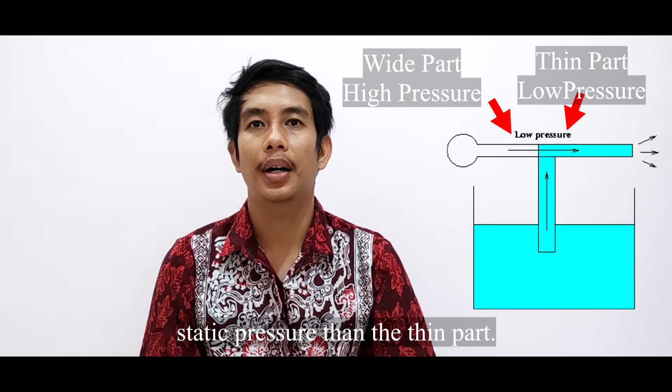Hi, now I'm going to explain the Bernoulli principle. Bernoulli's principle is an idea of fluid dynamics. It says that as the speed of the fluid increases, pressure decreases. This photo shows that the air in the wide part of the tube has a higher static pressure than in the thin part. For a steady flow, the amount of fluid entering the pipe must equal the amount leaving the pipe. So the fluid speed in the thin part must increase.

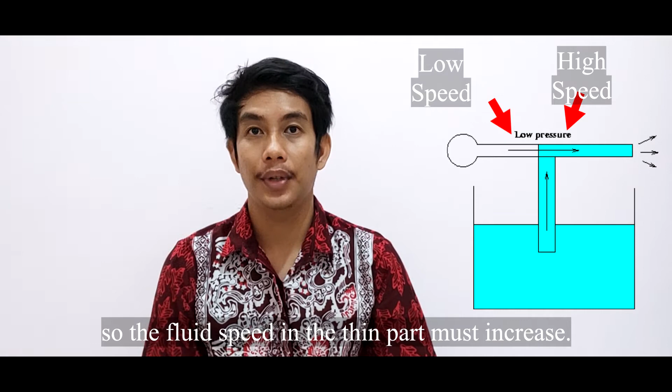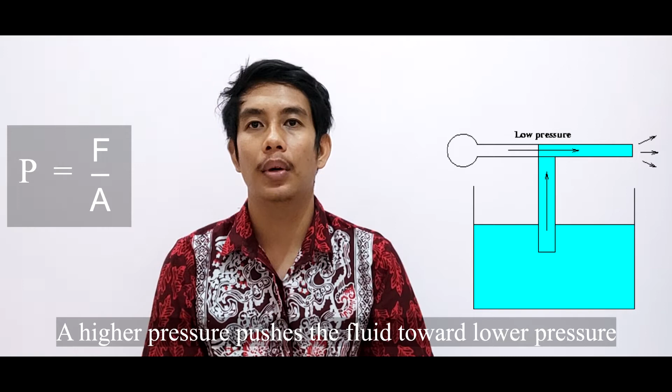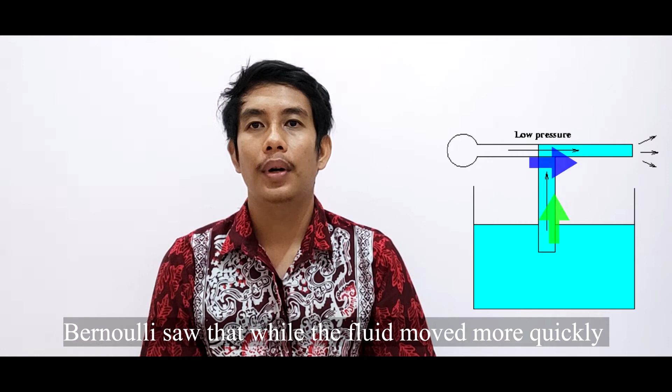When force acts over an area, it is called pressure. A higher pressure pushes the fluid toward lower pressure. So any change in the fluid's speed must be matched by a change in force. Bernoulli saw that while the fluid moved more quickly in a smaller part of the tube, the pressure becomes less. Therefore, the fluid will flow upward, mix with the air and exit the tube.

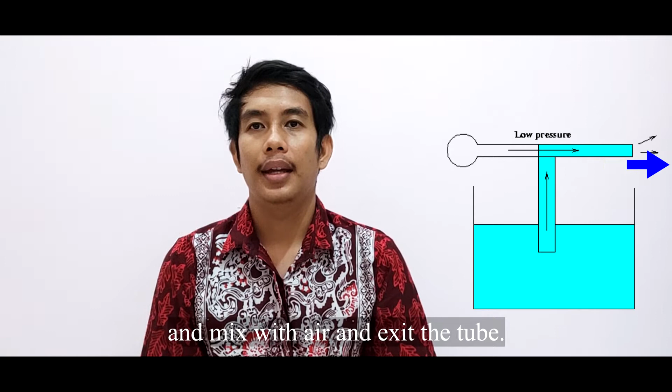Hi, now I will start to assemble the mini atomizer using a bicycle pump. The parts that we need to prepare are an air tube with 4mm diameter, a soda can, scissors, a straw, a hot glue gun, a mini driller, and last but not least, the bicycle pump.

First, we drill a mini hole at the top of the soda can so we can insert the straw into the soda can. After drilling, we try to insert the straw into this hole to make sure the hole that we drilled is big enough. Then, we fix the straw at the hole using the hot glue gun. Make sure it comes out a little bit on the top of the soda can.

The pipe that we use is 4mm diameter. Now, we mark 5 cm of the pipe and cut a hole. After that, attach the plastic pipe onto it. So the DIY mini atomizer is done.

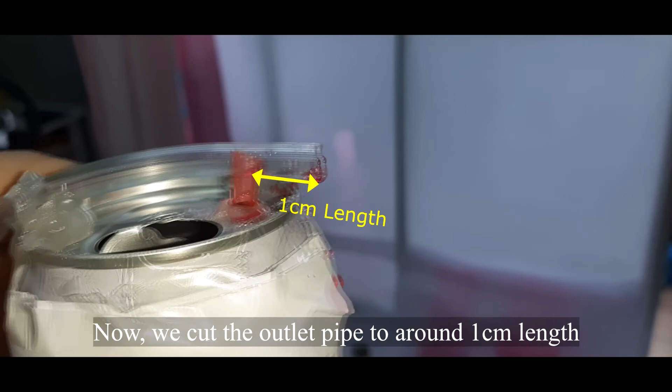Now, we cut the outlet pipe to around 1 cm length and repeat the experiment. First is with the straw at max height, then followed by the minimum height.

Let's compare the results that we get. The left side shows the experiment done with the longer outlet pipe and maximum straw height. It sprays more fluid but not perfectly, since it's not even. The right side is done with the longer outlet pipe and minimum straw height, and it sprays very little fluid.

Then let's see the result when we cut the outlet pipe to 1 cm. The left side is maximum height and it sprays more fluid and more evenly compared to the first one. However, the right side is minimum height of straw. It looks similar to the second result.

In this task, the objective is manipulating the variables, which are the length of the outlet pipe and the ratio of the surface area for the top of the vertical tube connected with the fluid pipe. The objective is to find out the best way for the air atomizer sprayer to achieve optimal results.

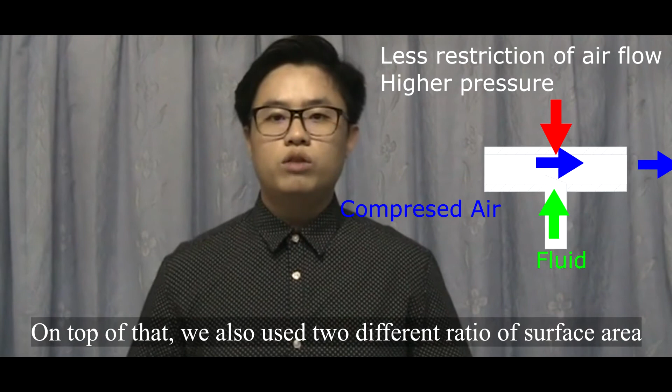In our project, we use two different lengths of outlet pipe, which are 1 cm and 5 cm. On top of that, we also use two different ratios of the surface area for the top of the vertical tube connected with the fluid pipe. In other words, the distance of the vertical tube inside the fluid pipe will affect the result of the droplets.

To achieve optimal results, the outlet pipe should be as short as possible, so that the mixture will spray wider and the paint will coat more evenly. Then, the restriction at the center point is adjusted to change the ratio of the mixture between the air and the fluid. The higher the restriction, the smaller the surface area the air can pass through at the center point. Therefore, the flow will increase at that point and the pressure will decrease.

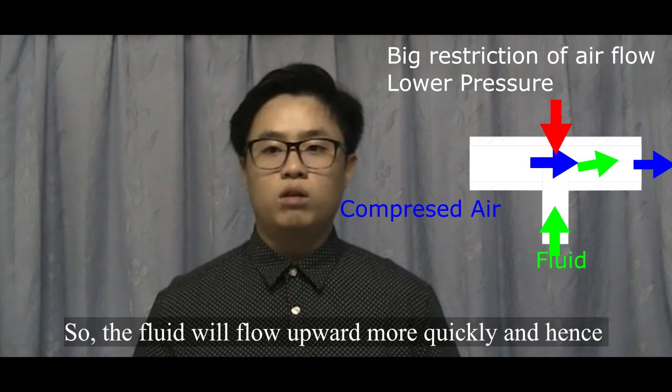So, the fluid will flow upwards quickly, and hence the fluid has a higher ratio in the mixture in the outlet tube compared to the air.

In conclusion, the project functioned well as we expected. We can adjust the restriction area to adjust the ratio of the mixture of air and fluid depending on the situation. Therefore, this mini atomizer using a handheld bicycle pump that we built works and can be used as a normal spray gun. Thank you for watching.